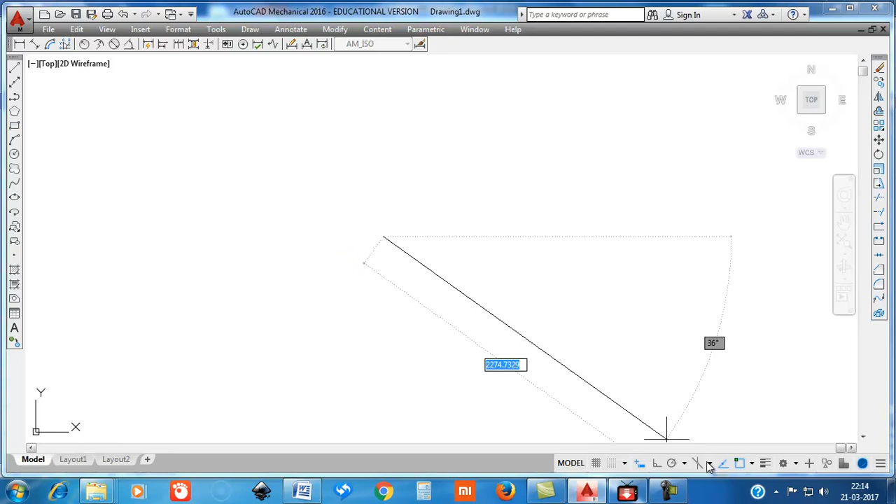So thickness of the base is 15 millimeters. Line, 15 millimeters, or put it in ortho mode, 15 millimeters.

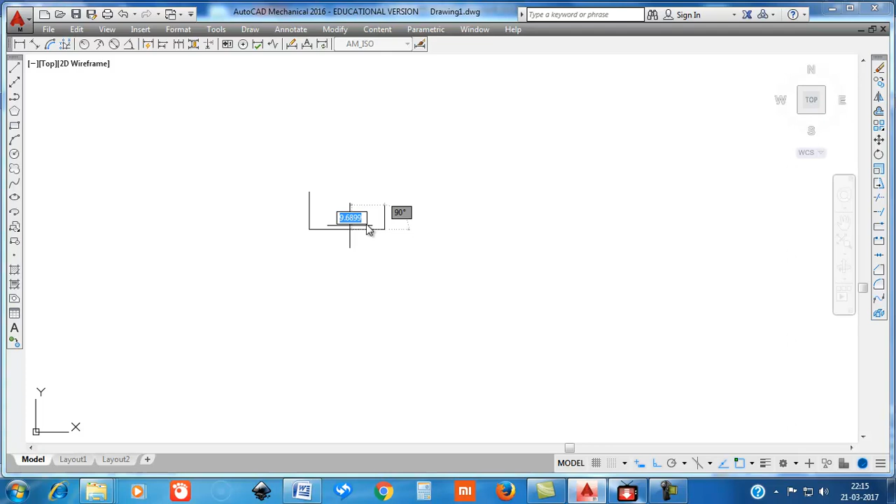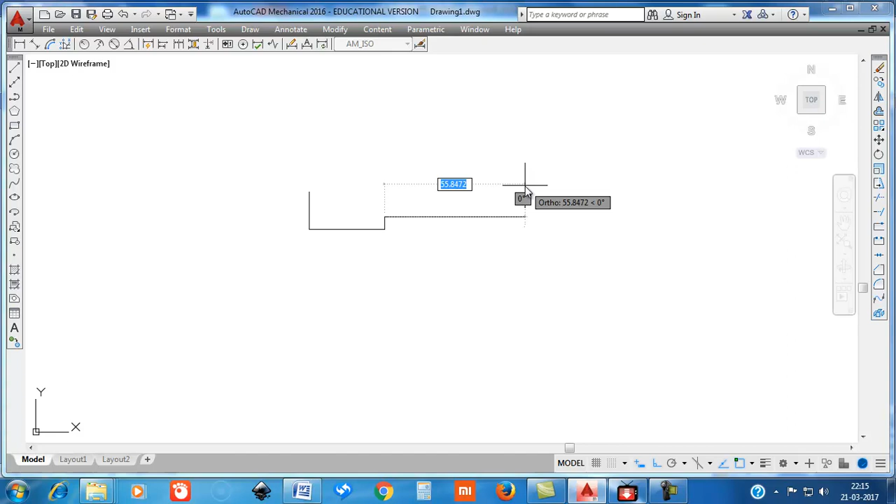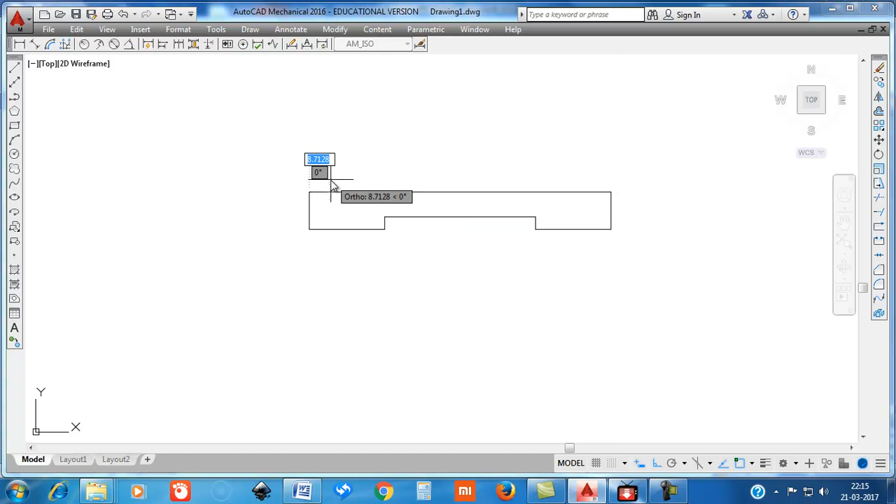Okay, then this is 120/60, that means 30 millimeters to the right, and up by 5 millimeters. This is the dimension. 5, and to the right by 60 millimeters, down by 5 millimeters, and to the right by 30 millimeters, up by 15 millimeters, and then all the way by 120 millimeters. That is the base.

And in the base there are four holes, 5, 10, and note that these holes are located at a distance of 15 millimeters from the front end and 15 millimeters from the side ends, like this. So we'll show the holes.

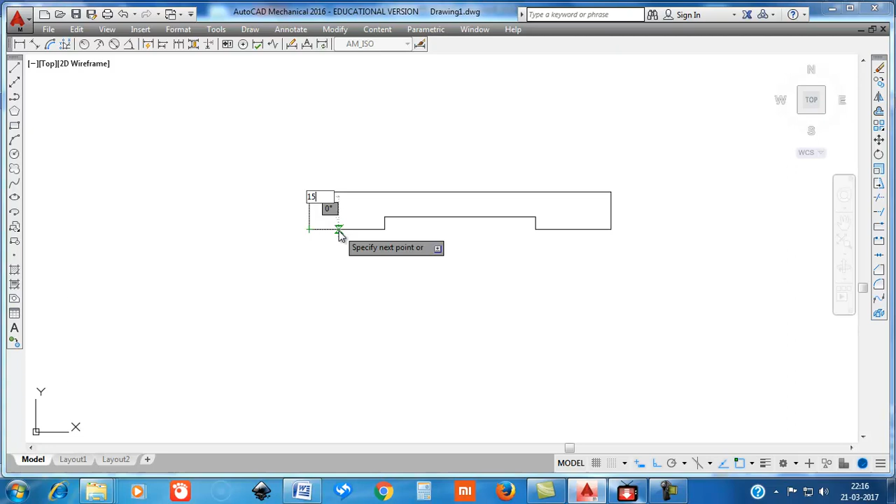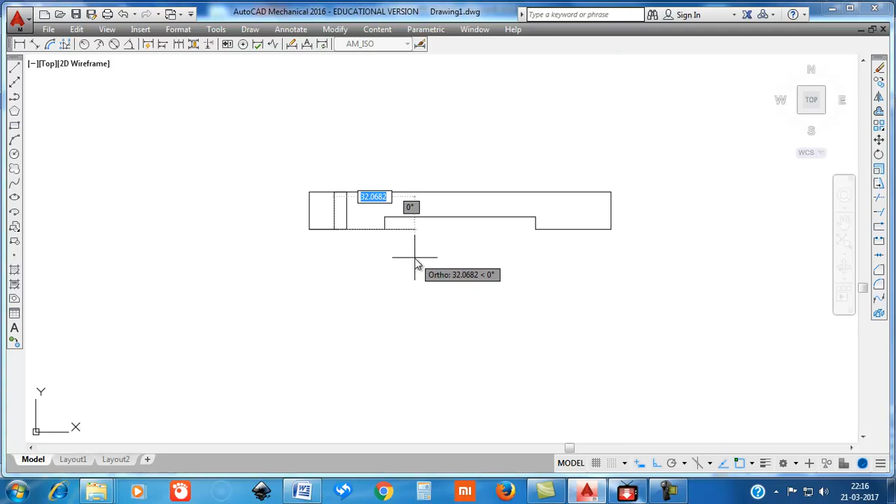Line from here 15 millimeters, we come to the center line of the hole, and this is 15 millimeters axis, and to the left by 5 millimeters, down by 15 millimeters, and to the right by 10 millimeters, and up by 15 millimeters. This shows two holes, one in the front and one in the back.

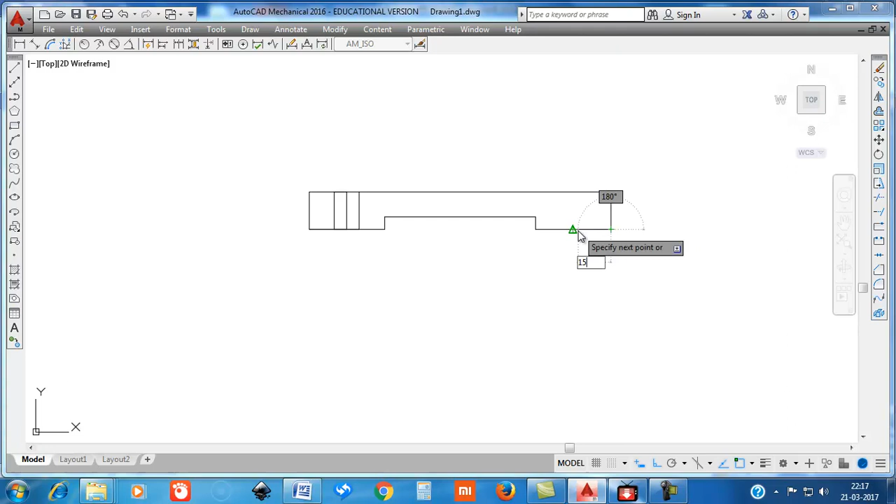Similarly on this side, repeat line from here 15 millimeters and go up by 15 millimeters, to the right by 5 millimeters, down by 15 millimeters, to the left by 10 millimeters, and up by 15 millimeters.

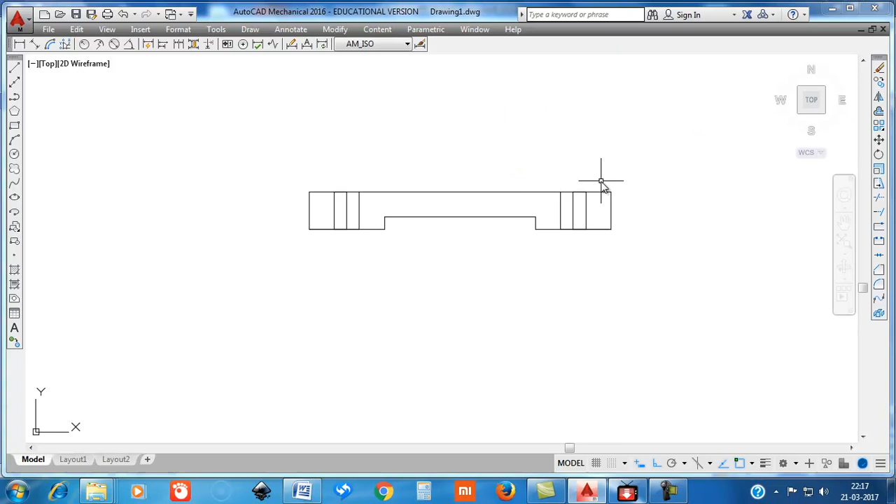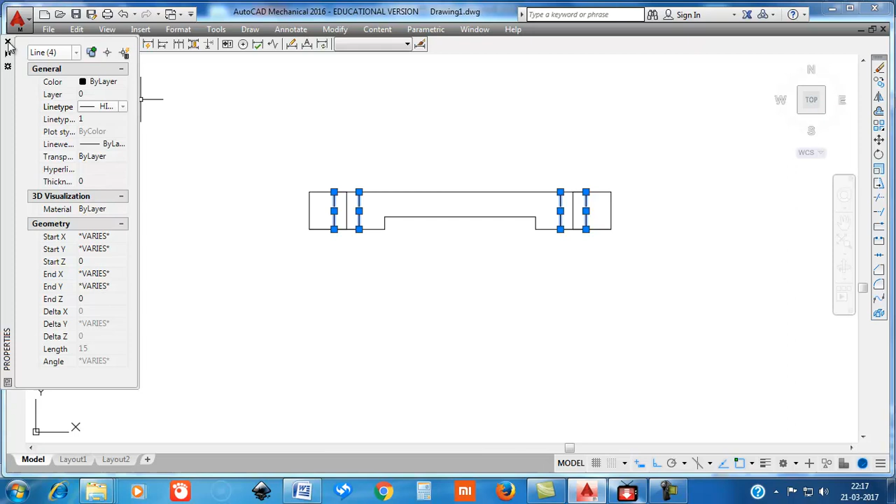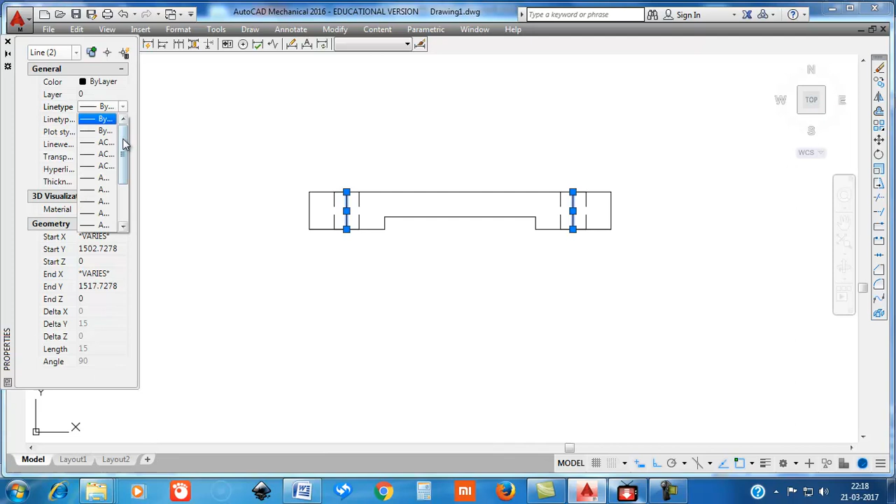So now this line, this and this, they have to be dashed lines, hidden lines. Line type hidden, close, escape. And now this line, this line and this line, they have to be center lines. Properties, center line, escape.

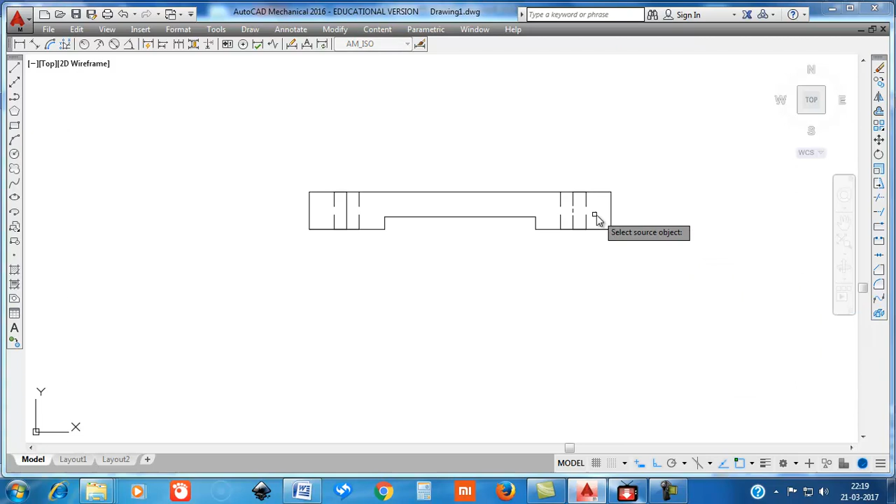Make this match properties come out of the command. So after that base, now we have to draw this annulus first and then this support. From the right hand side, it is at a distance of 30 millimeter, and height of the center from the top of this base is 60 millimeters.

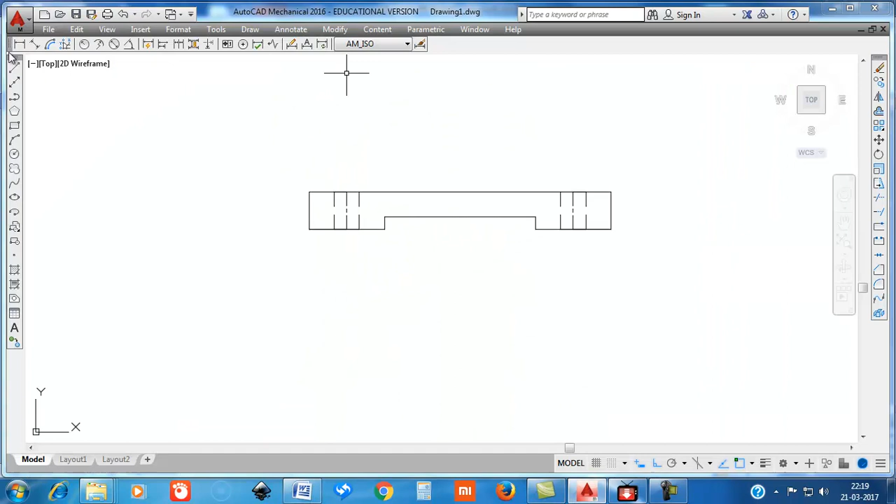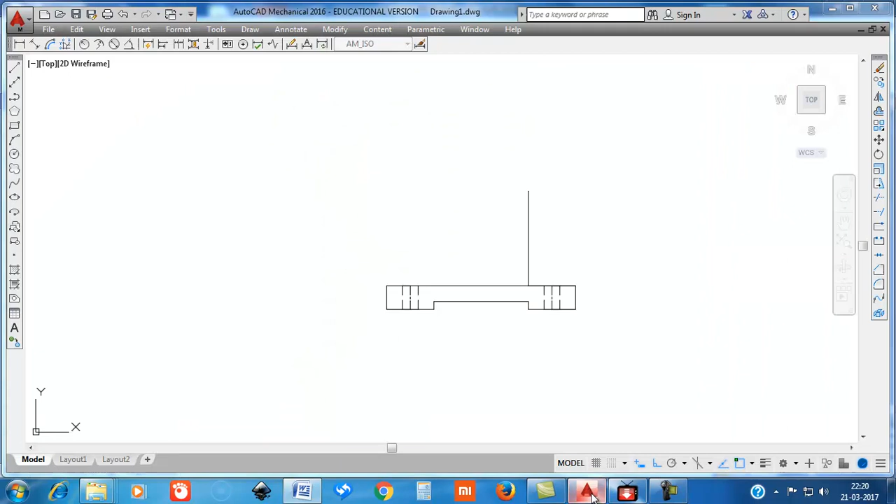So line from here 30 millimeters and go up by 60 millimeters, comma, and now circle inside 50, outside 70. So this is center, radius 25.

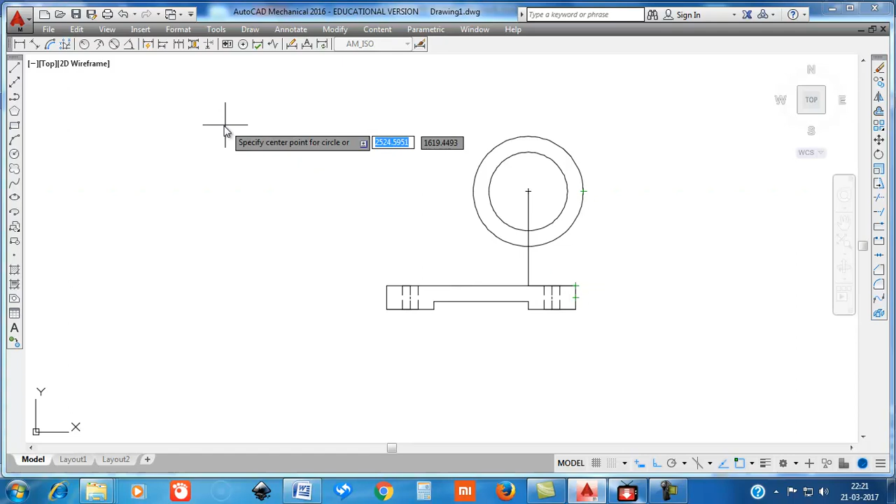Repeat circle, this 35. Then there is a rib here which runs tangential to this, and then there is a rib which is starting from 35 millimeters here. So line from here 35 millimeters

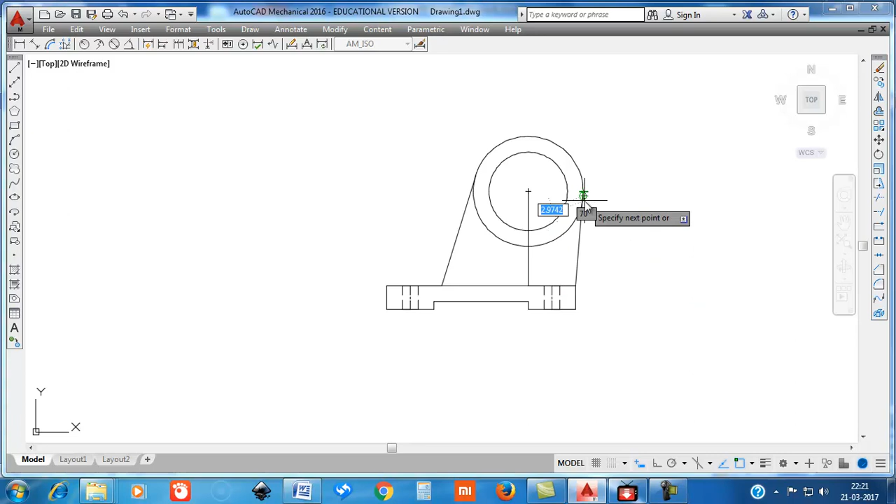and then a line, it should be tangential to that, tangential. Then repeat line from this corner, it must be tangential to that. Okay, that is the front view.

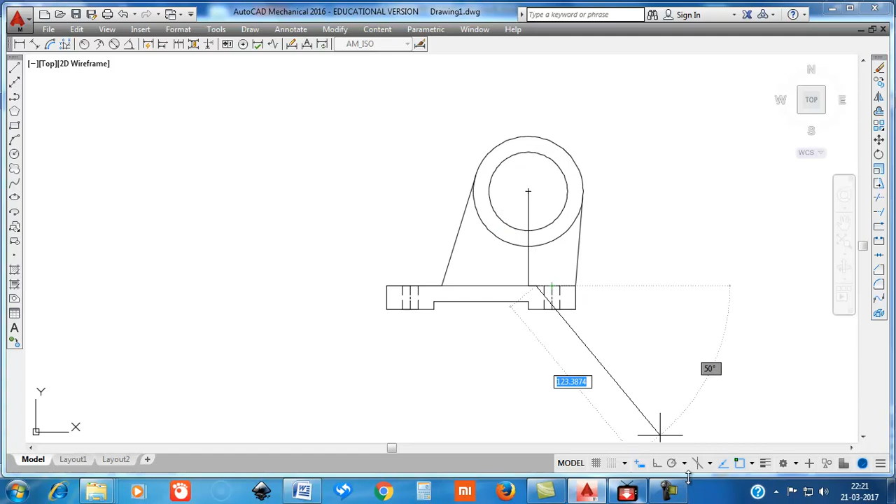Now we have to draw the support here. Support line thickness is 10 millimeters, to the right by 5 millimeters, go up all the way, just draw a vertical line. Okay, and then repeat line from here to the left by 5 millimeters and go up all the way.

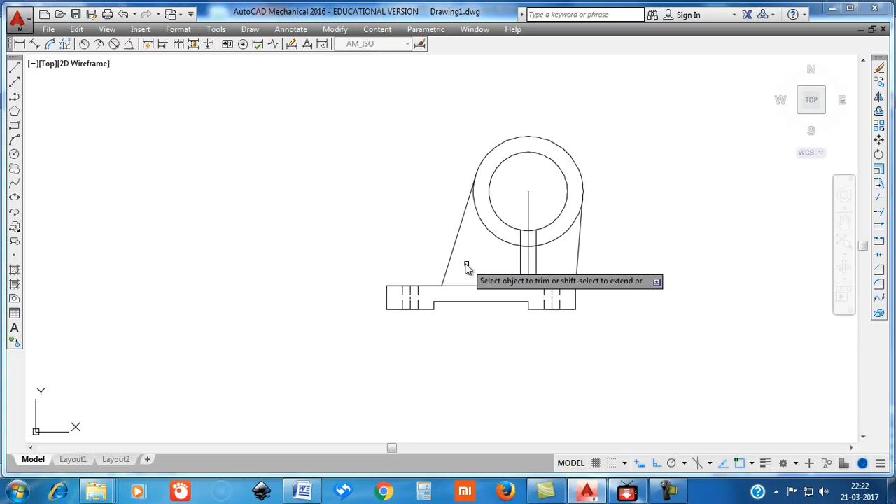Now trim this, this, this, this, this, also this and this, and where this and this. Okay, and then remove this line.

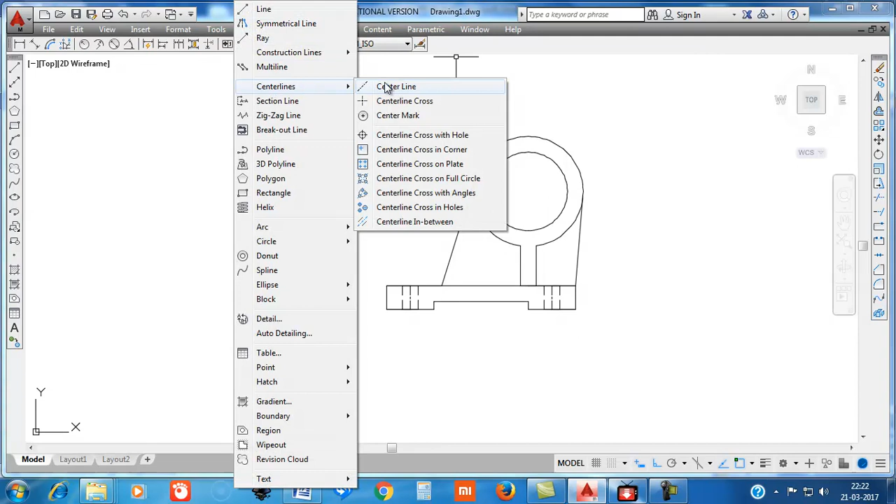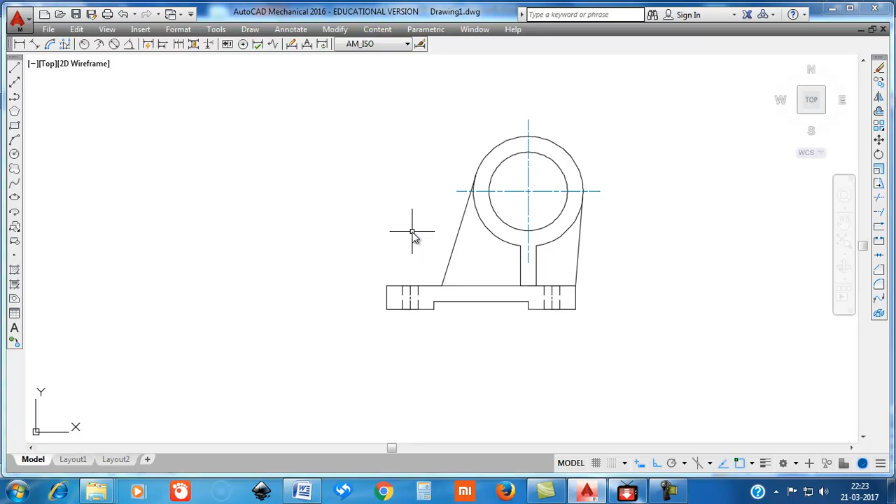Now mark the center lines. Draw center line from here. Draw center line, cross lines like this. Escape. Okay. So that completes the front view.

Now we have to draw the top view. To draw the top view, first we draw the base. Base is a rectangle of 80 by 120. Take alignment here.

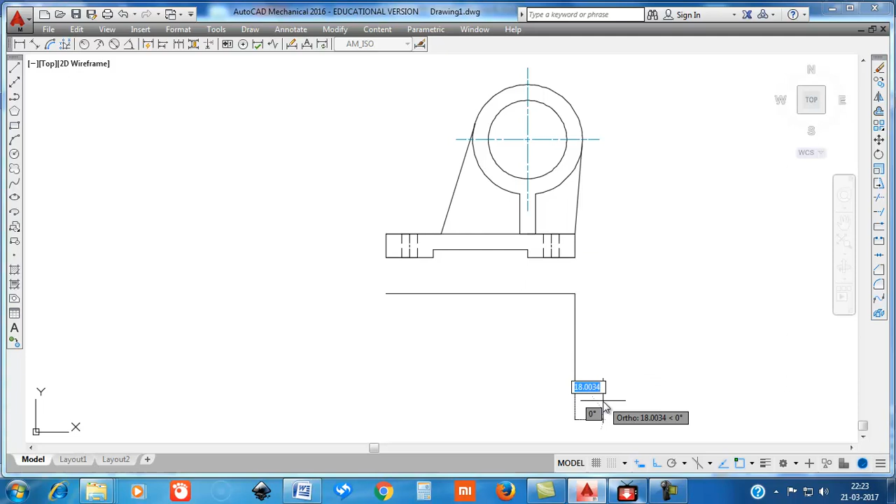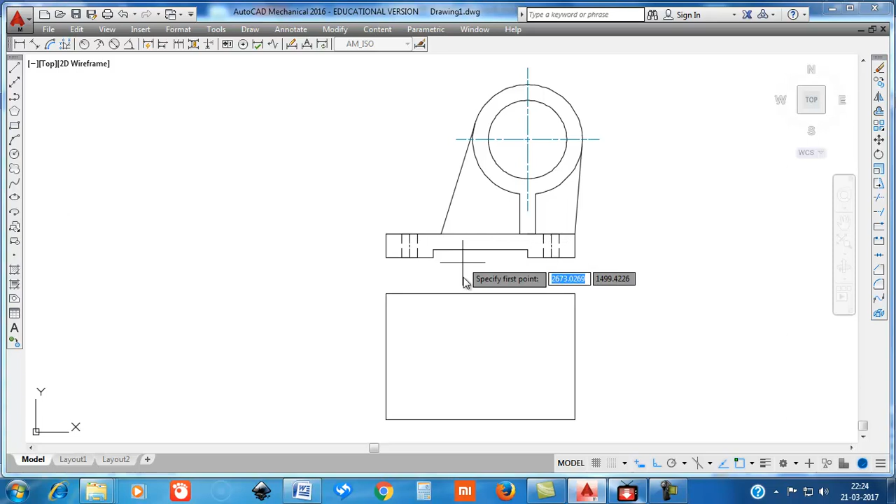And then we mark that cylinder from the center here. We come to the left by 35 millimeters and then go up by total length of the cylinder is 60 millimeters. Okay, so 35 millimeters here and 35 millimeters here.

60 millimeters, 70 millimeters, 60 millimeters and 35 millimeters. That is the cylinder.

Now we have to show the hidden outline of the hole. So line from here, it is 25 and down by 60, 50 millimeters, up by 60. So that is the hidden outline of the hole.

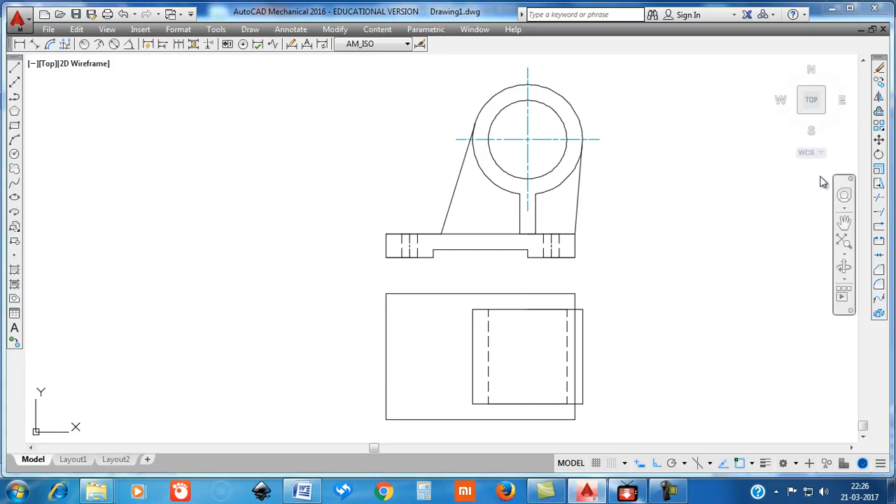Match properties of this to this and to this, and this edge here, this portion of the base edge will not be visible, so we have to make it separate and then assign properties. So first remove this line and this line, delete them, and then trim this line, then draw that line again, and then match properties

of this to this. So that is the base edge. These two are hidden outlines of the hole, and then this is the edge. This edge, which is hidden by this cylinder.

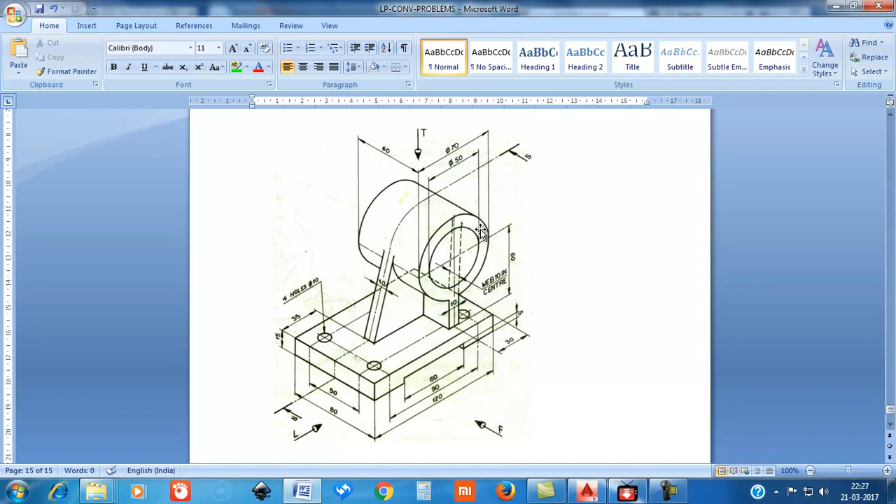And after that we have to mark those holes there. To mark the holes, first we mark the centers from here, 15 millimeters and 120 millimeters. From this 15 millimeters and 120 millimeters.

Repeat line from here 15 millimeters and come down by 60 millimeters. 60, 80 millimeters. It should be 80 millimeters, okay, by 20 millimeters,

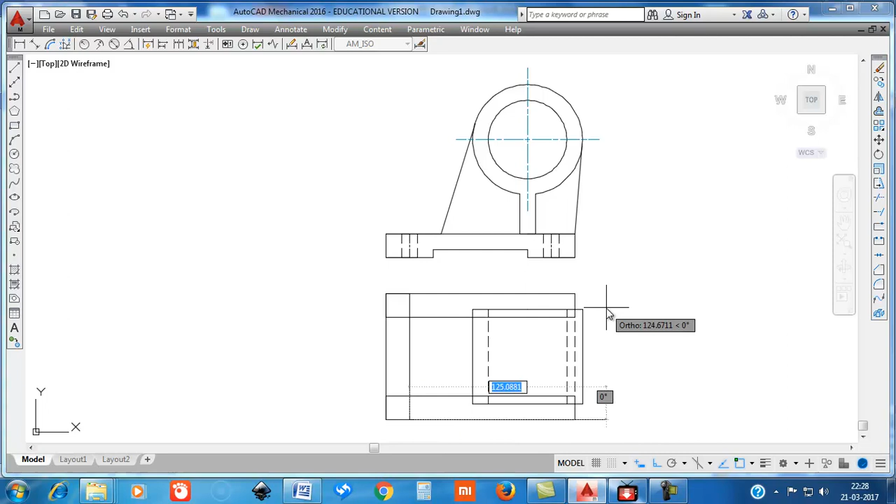and repeat line from this end 15 millimeters, come down by 80 millimeters. Okay, now we have to draw the hole. These are the hole centers, this and this.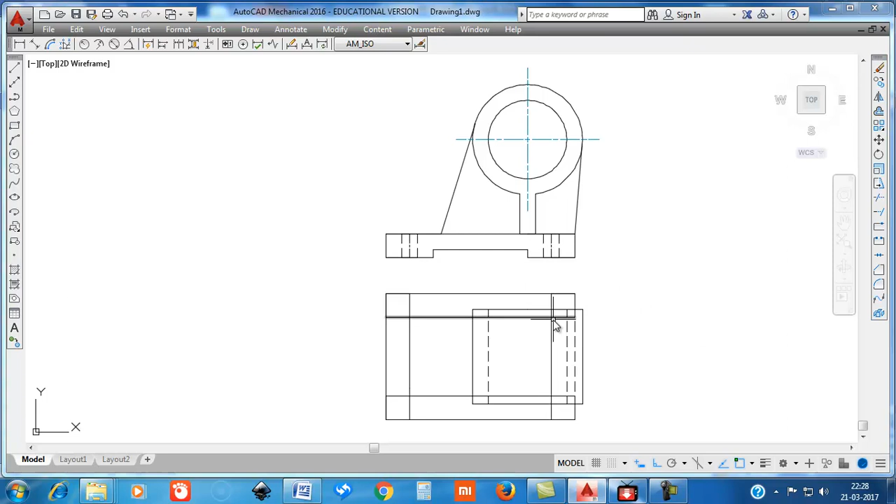Circle, this has center, radius 5 millimeters. Repeat circle at this intersection, 5 millimeters. Repeat circle, this has center, 5 millimeters. Repeat circle, this has center, 5 millimeters.

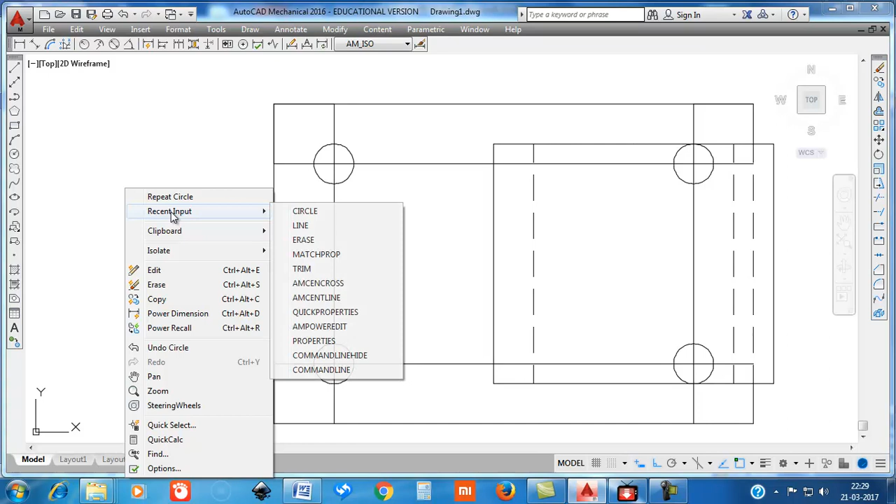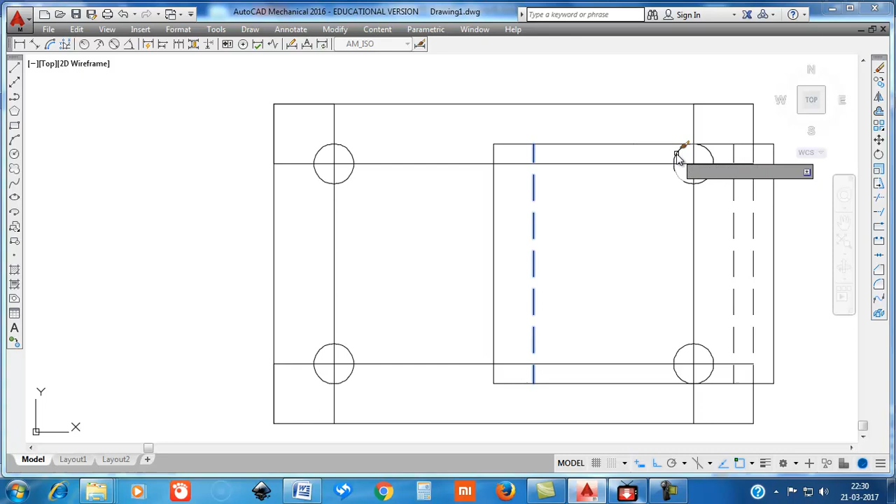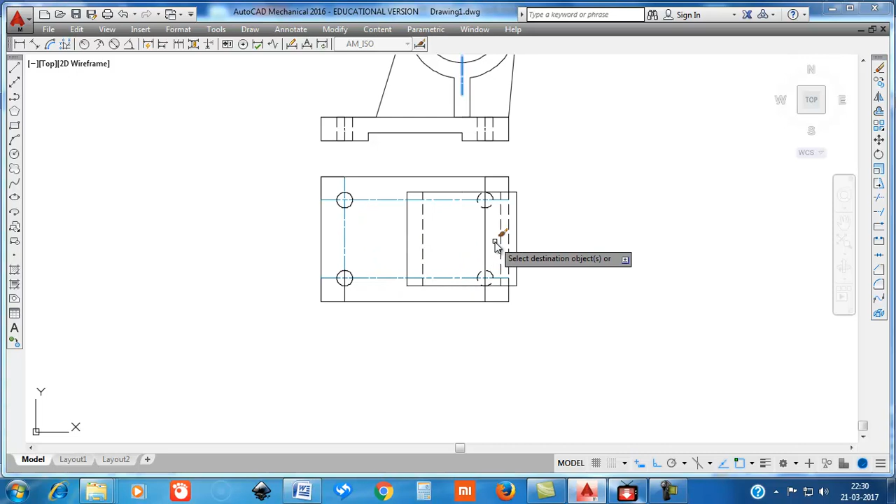Okay, and now this circle and this circle will not be visible, so using recent inputs, match properties of this to this line and to this. Those are the hidden holes. Match properties of this to this to this to this and to this. Okay, come out of the command.

So now we have to show the two ribs there. First rib is from the mid center of this, 35 millimeters, and from here 5 millimeters. Come out of the command.

First we have to get this point of tangency. We'll project it from the front view. From here we'll draw that line. That rib will come up to this line.

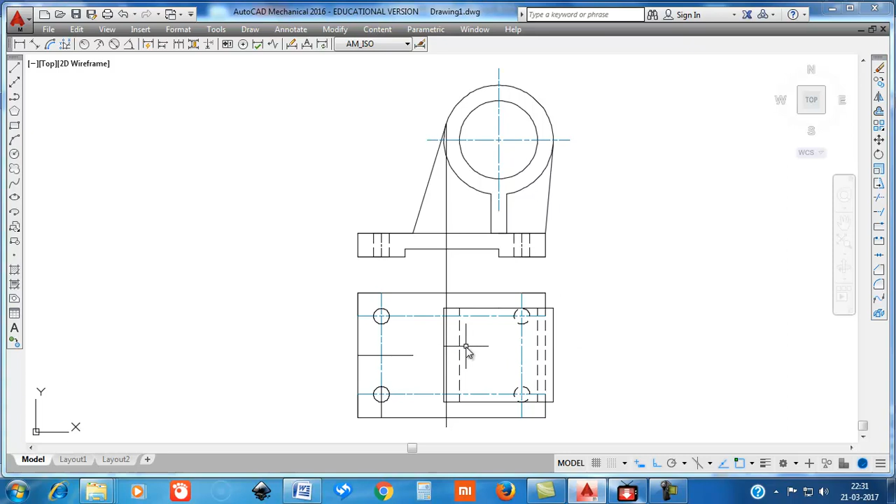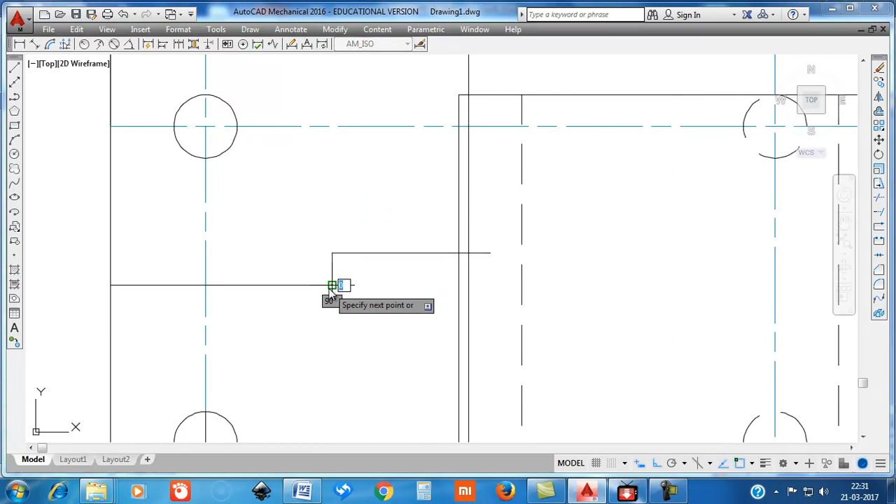Okay, so now line from the end of this, go up by 5 millimeters, and just draw a line. Later we'll trim it. Again from here draw a 5 millimeter line, and then draw a line like this.

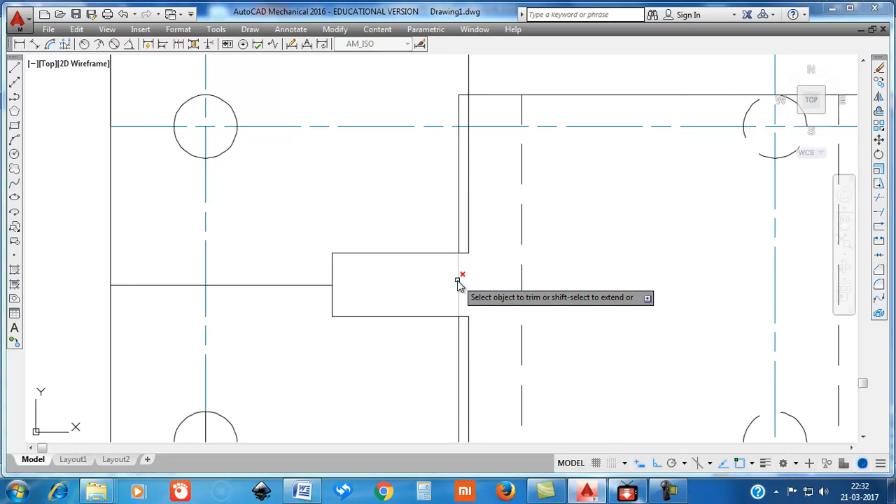Now trim this portion, and this portion, also that cylinder outline here. So that's how the rib looks like. And then remove this line, the projectors. Escape.

Okay, so that is the rib. Now a similar rib on this side. Line from the center of this here, 5 millimeters up, draw a line, then down by 10 millimeters and up to this line.

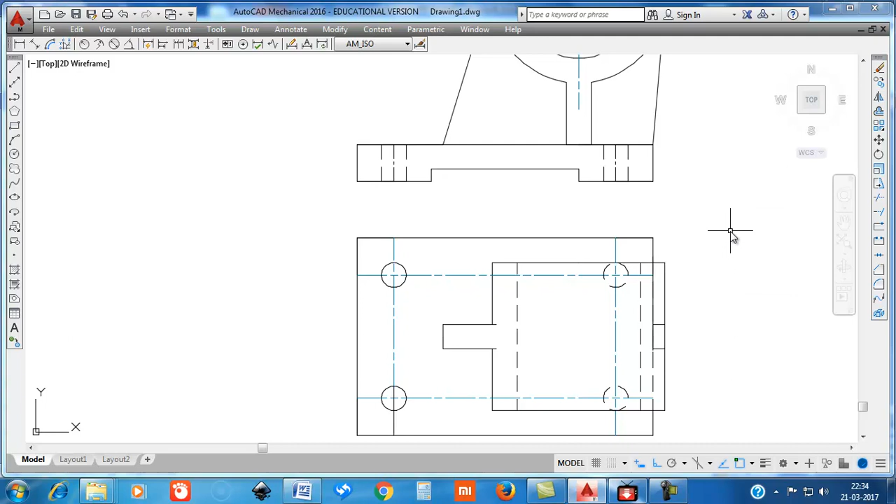Delete. Repeat line from here, 5 millimeters down, and then a horizontal line. Enter. Now trim this line and this line, and delete this line. Now we have to make these two lines dashed.

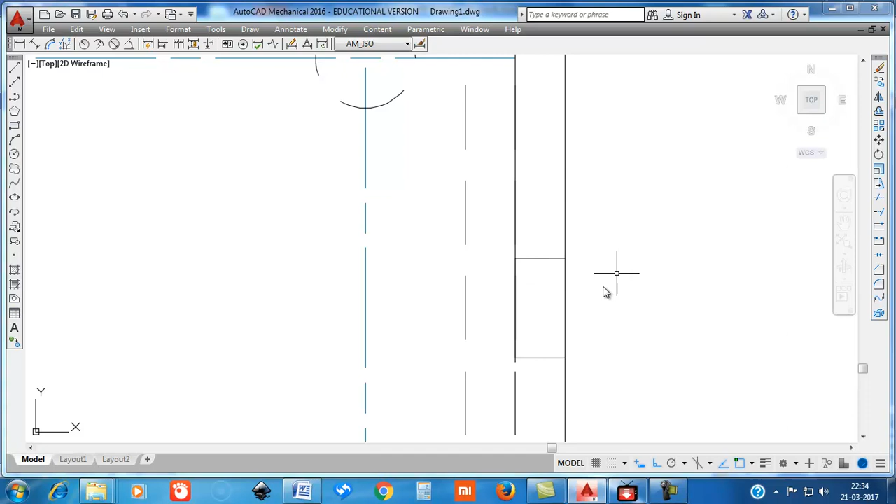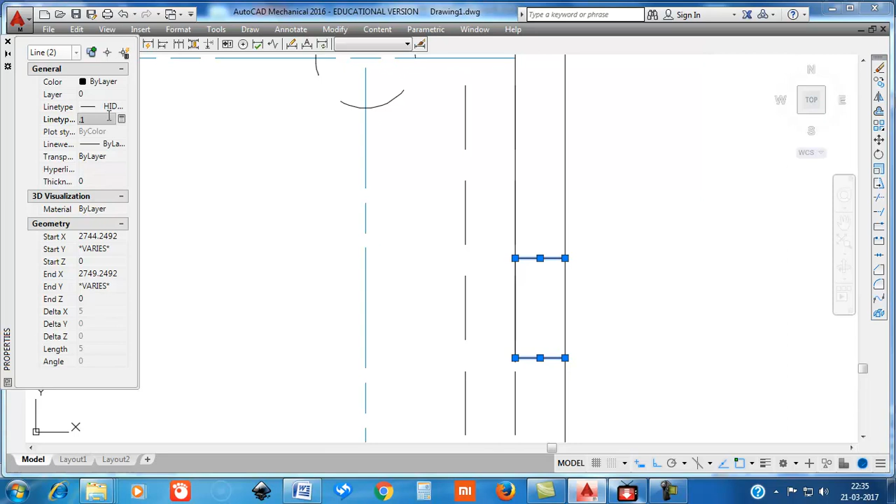This line and this line, they must be dashed. So select this and select this. Properties, hidden lines, and then linetype scale will make it 0.1. Enter. Close.

Escape. So that is a rib which is not visible when you see from the top. So that completes the front view and top view. Now we have to draw the left side view.

Left side view will be to the right of the front view. Take alignment. This will be a rectangle of 80 by 15. 80. Enter. 15. Enter. 80 down by 15.

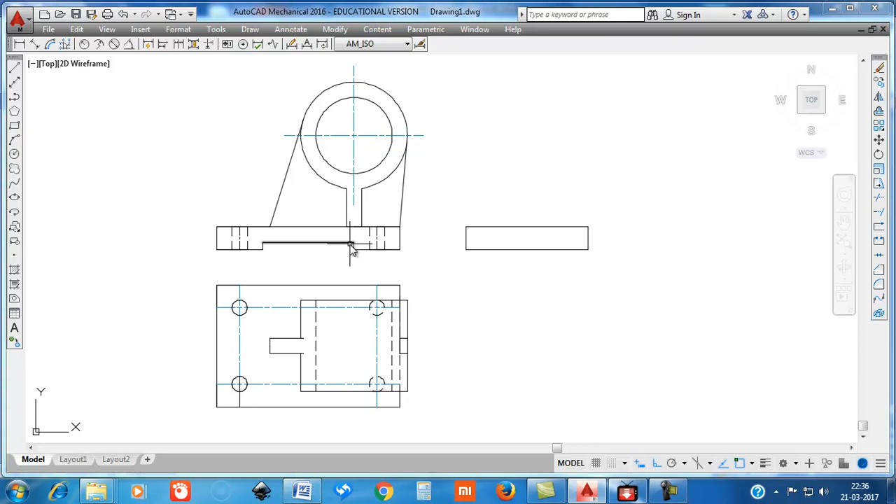And then these two edges are not visible, so from here go up by 5 millimeters and then 80 millimeters. Match properties of this to this, so that is the base. Now we have to show those holes.

Line from here 15 millimeters down by 15, to the right by 5 millimeters and up by 15, to the left by 10 and down by 15. That is one hole. And now we have to mark one more hole from here.

15 down by 15, to the right by 5, up by 15, to the left by 10, down by 15.

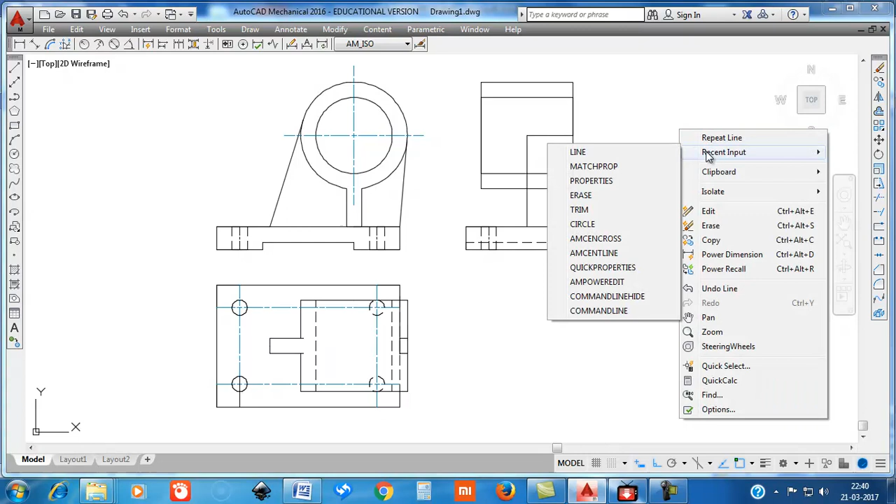Now we have to mark the hole. Line from here, go up by 25, to the left by 60, down by 50, to the right by 60. That is the hole. So using recent inputs, match properties of this to this and to this, that is the hole.

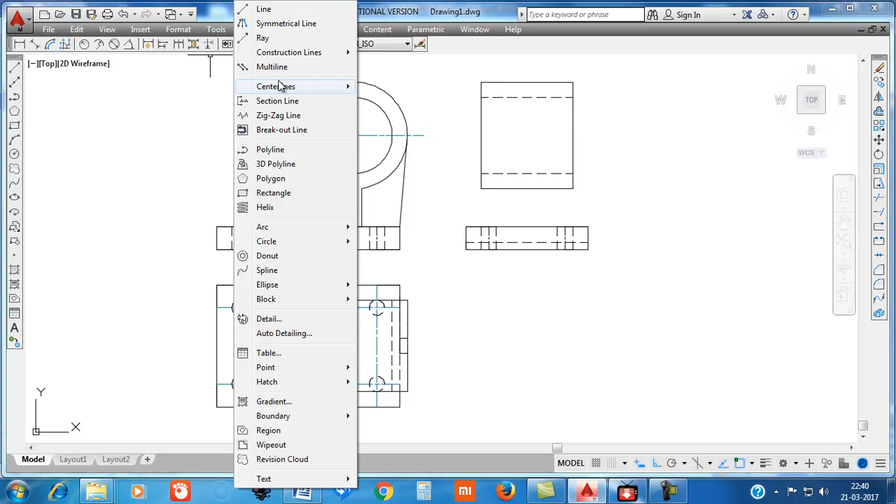Now remove this line, remove this line and remove this line. So remove this line. Now draw a center line from the middle of this to the end of this, and then we have to draw the rib.

Support is there from both ends. So from here draw a support here and here, like this.

Okay, now we have to show the rib. For showing the rib, first we get the point of tangency here, that is the projector. Now from the center of this to the right by 5 mm and go up there. Just draw a line, we'll trim later. Repeat line from the end of this, 5 millimeters up there. Okay, and then trim this.

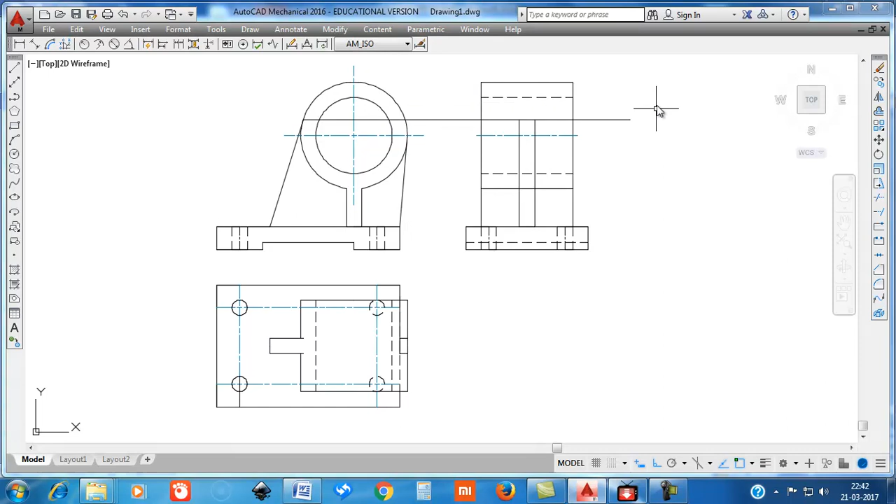Now we can remove that projector. This projector you just delete. So that's the rib, and in this portion there is no edge, so trim this portion. So that is the rib as seen, and there is another rib on the other side which coincides with this.

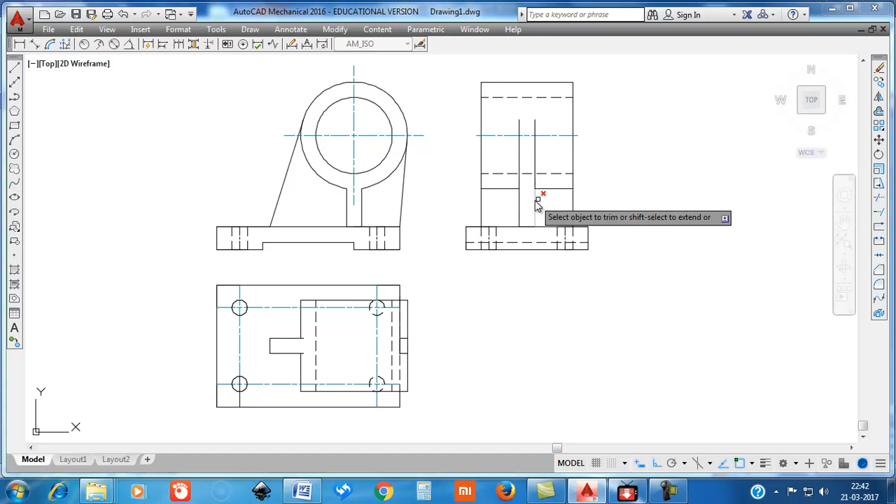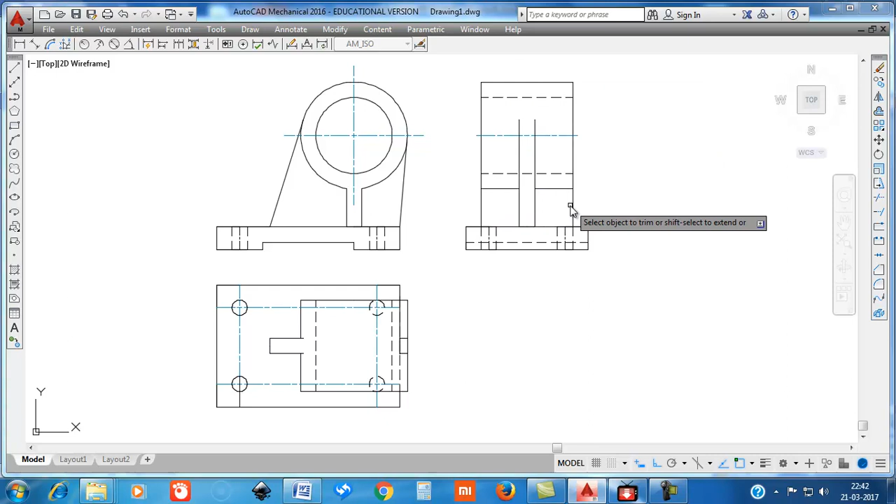That completes the side view. You just check whether you have shown all those things. You have shown the base, you have shown the slot, you have shown the holes, you have shown the cylinder, hole, and then the rib, and also the support. So that completes the side view.

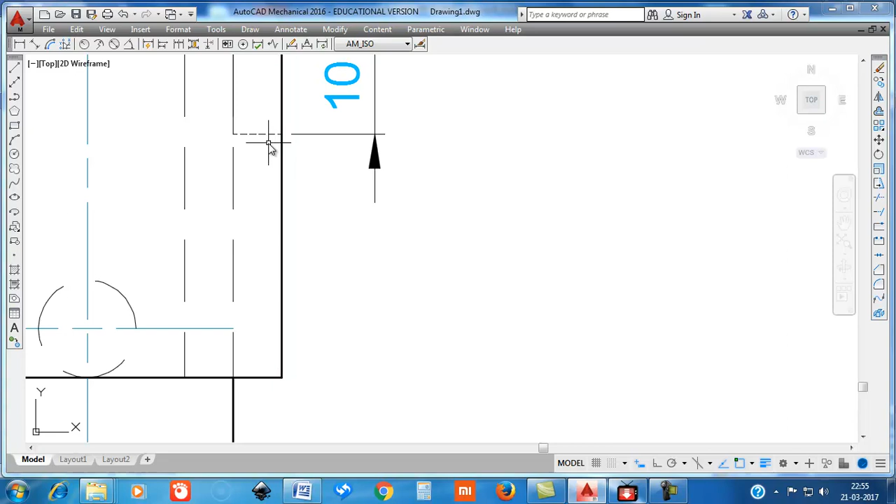Write dimensions as shown in the figure, and then finish by drawing thick lines to represent visible outlines and edges. Also you must notice that these two lines, though they are dashed lines, because they are so small they look like continuous lines. So when you draw manually, you must show them as dashed lines. So that completes the drawing.